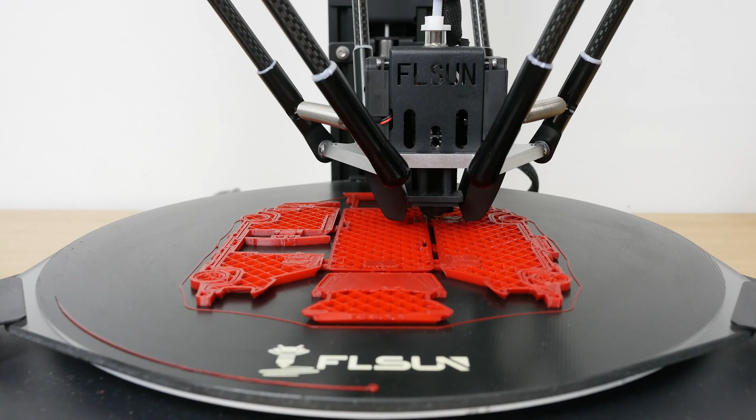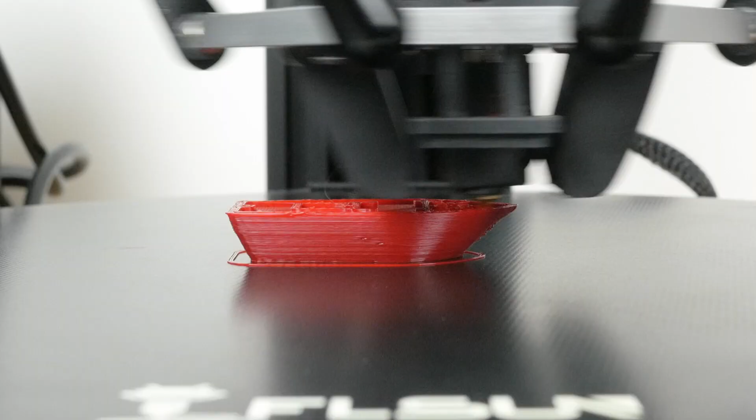The FLSUN Super Racer is capable of printing up to 3 times faster than your conventional 3D printer, and it has auto bed leveling, a 3.5-inch touchscreen and a large print volume. I'll find out how easy it is to set up and use, and I'll put their claims to the test to see just how fast it can print a variety of materials, and how these faster speeds affect print quality.

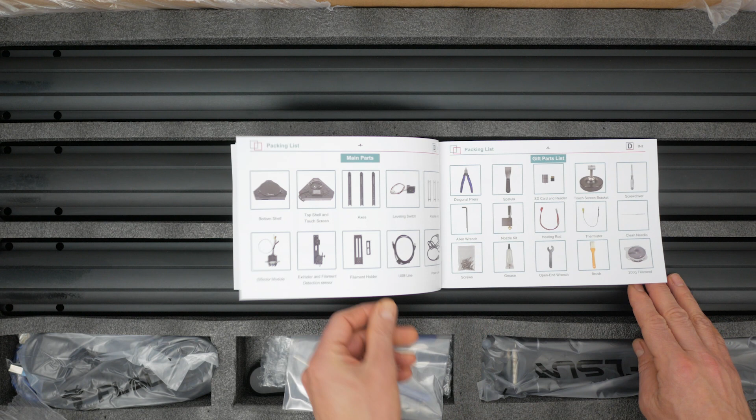The printer comes in a large long box and requires some assembly. There are quite a few parts and assembly does look a little intimidating. But there are clear instructions in the supplied user manual and there's a useful accompanying video too. I'd recommend watching the video first for an overview and then following the instructions in the manual to make sure you don't miss any steps. It'll take 30 to 60 minutes to assemble depending on your previous experience. And it is far easier than it initially seems.

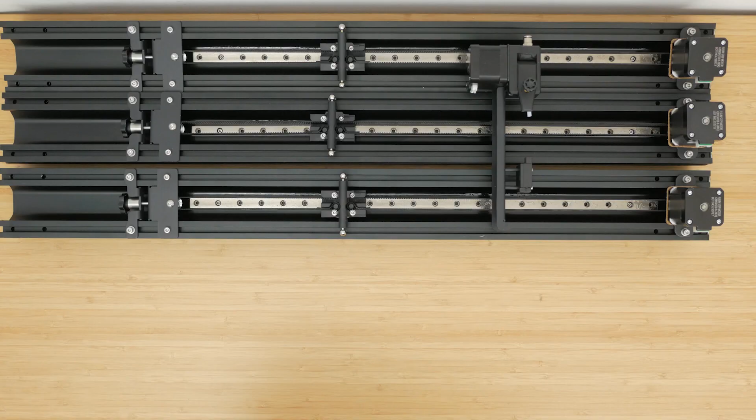All the tools you need to assemble the printer are included, and FLSUN include a generous selection of spares too, including almost a complete spare hotend together with a spare heater and thermistor. There's also a microSD card reader with a 4GB microSD card loaded with an electronic version of the user guide, a test print and links to set up and troubleshooting videos. There's even a piece of sandpaper to clean up your prints.

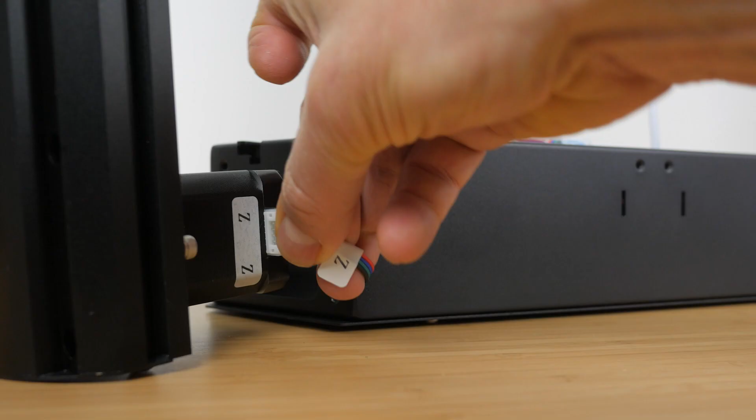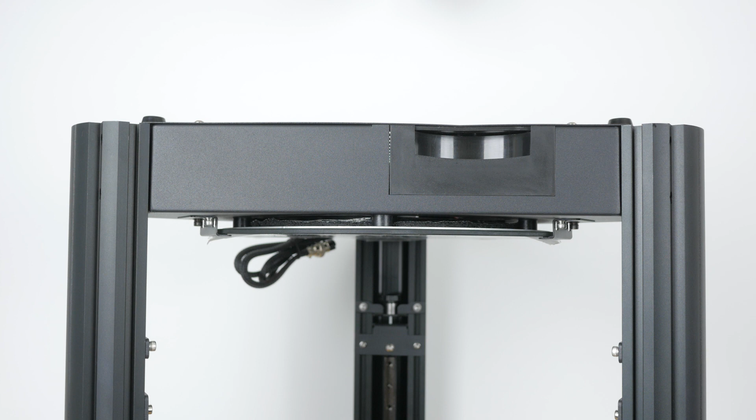You put it together upside down, attaching the 3 800mm axes to the top with the supplied M4 bolts. You'll need to plug in the corresponding stepper motor cable for each axis, which is clearly labelled, before you attach it. Then you bolt the base to the top of the partial assembly in the same way, making sure the FLSUN logo on the base aligns with the logo on the front of the glass build plate. The base has metal tabs which support it while you screw in the bolts, but it's a little precarious. I attached a single bolt to 2 sides before installing the remaining bolts.

Then the touchscreen bracket slides into the groove of the right axis. You'll need to unscrew the bolt from the T-nut so it's flush before sliding it in. Then you can tighten to lock it in place around 1/3 of the way from the top before turning the printer the correct way up to continue assembly.

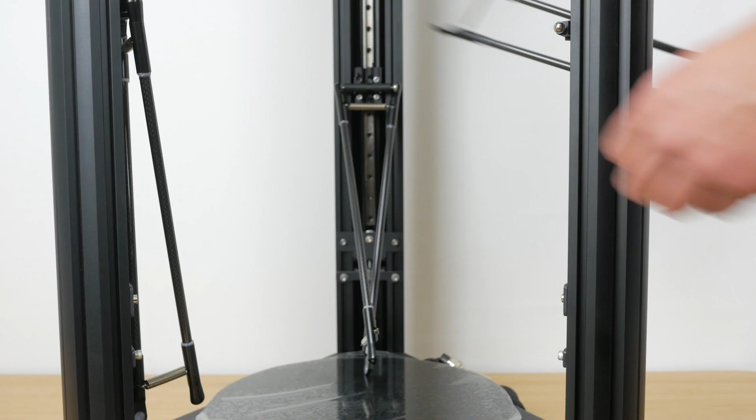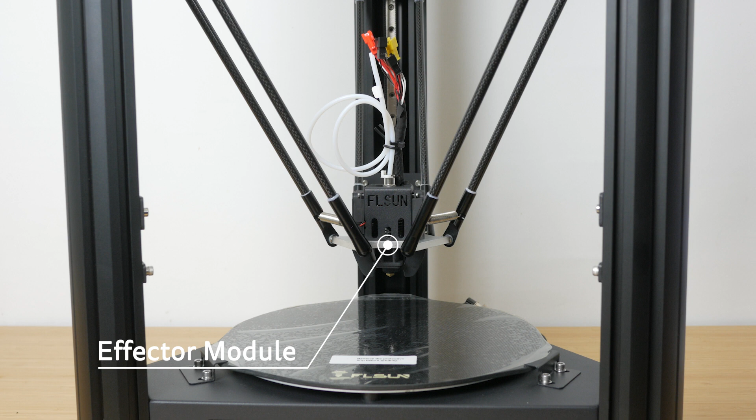The hot end of the printer is already installed in the so-called effector module, which attaches to the linear slides on the 3 vertical axes with lightweight spring-loaded carbon parallel arms. No tools are required to install the parallel arms, just pull them apart slightly and attach all 3 of them to the linear rails first. Then you can attach them to the effector module in the same way, with the FLSUN logo facing forward. The springs are quite tight, so make sure you don't nip your finger.

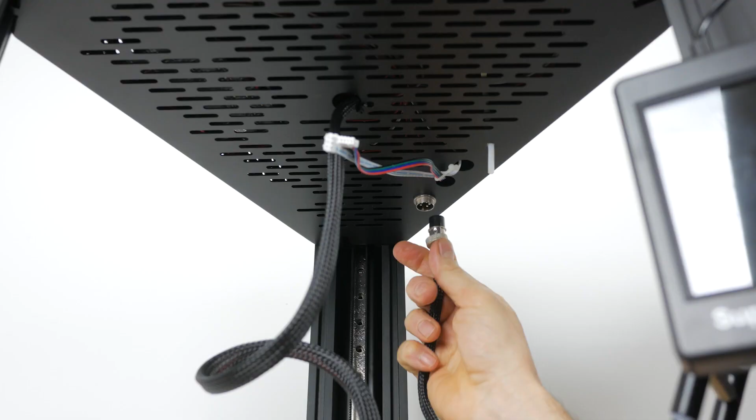Attach the colour-coded cables from the main board to this module. The 2 black connectors can be connected either way around. Then attach the main cable to the top of the unit with its keyed 5-pin connector and tuck the loose cable neatly into the groove of the axis.

Next, attach the extruder assembly, making sure the PTFE tube from the top of the printer lines up with the filament sensor. This hangs from the top of the printer and is secured with 2 bolts. Plug in the filament sensor and extruder motor cable and push in the PTFE tube from the hot end into the bottom of the extruder and secure it with a white clip.

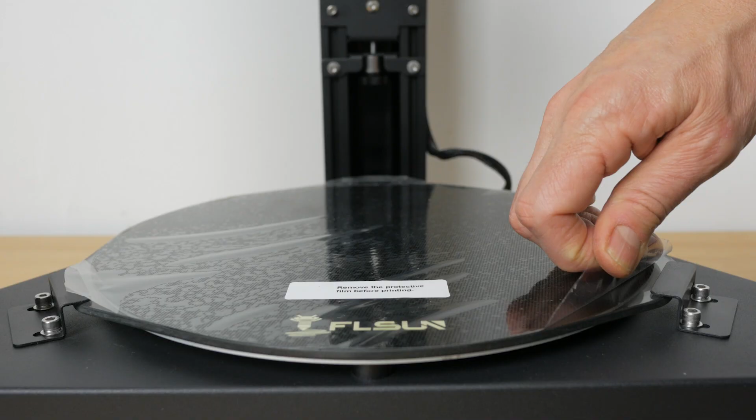Finally, lightly tie the PTFE tube to the main cable, assemble the basic filament holder and attach it to the top of the printer. Peel off the protective film from the glass bed and wipe it clean of any possible grease with IPA, which I'd recommend doing before every print.

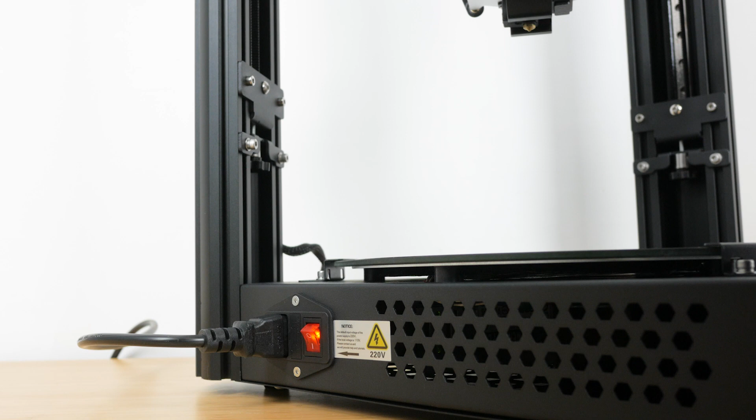By default, the voltage is set to 220 volts, which is correct here in the UK. But make sure you change the red switch to 115 volts in the US or anywhere else on 115 volts before you turn the printer on. I found the supplied mains cable was a loose fit, so used the spare cable I had. It is a standard kettle or IEC power lead, but I'd have expected better quality.

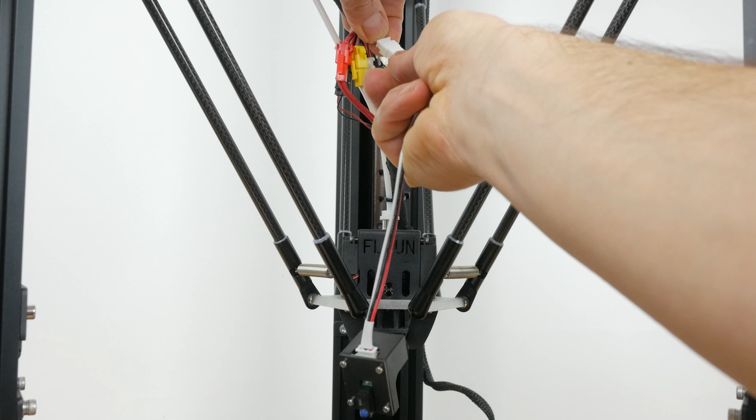The printer has automatic bed leveling, but unusually you'll need to attach the leveling sensor every time you level the bed, and must remember to remove it afterwards. Fortunately, since the bed is stationary, you only really need to do this occasionally, for example after a nozzle change or if you update the firmware. Connect the leveling switch to the cable labelled level and then attach the sensor magnetically, just in front of the nozzle.

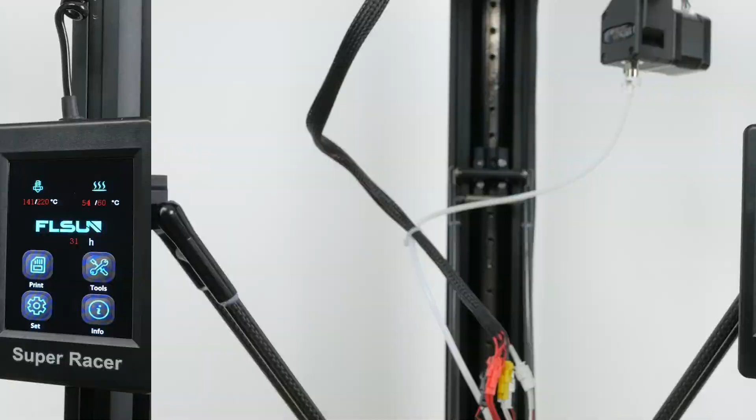Turn on the printer and tap Tools, Heat, PLA to heat up the bed and nozzle. When the printer is heated up, tap Tools, Auto Level, then Auto Leveling and confirm that the leveling switch is attached.

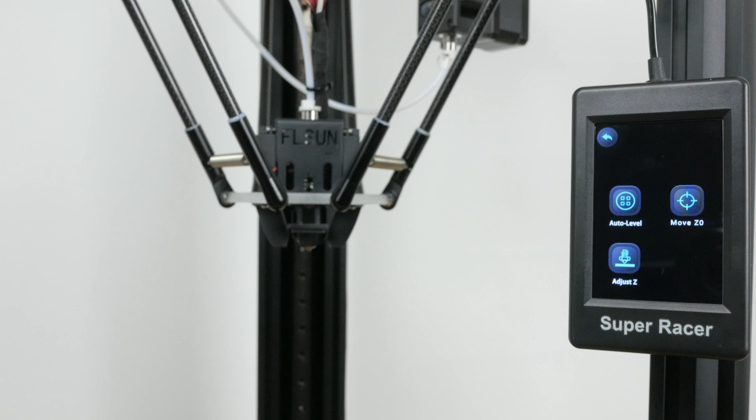The leveling process is quite slow, taking around 3 minutes. You can then remove the leveling switch and set the Z offset, which adjusts exactly how far the nozzle is from the bed. Tap Move Z0, and this time confirm the leveling switch is removed.

Use a piece of plain paper underneath the nozzle to set the nozzle height. Tap Adjust Z and move the nozzle until it just touches the paper. You should still be able to move the paper with just a little resistance.

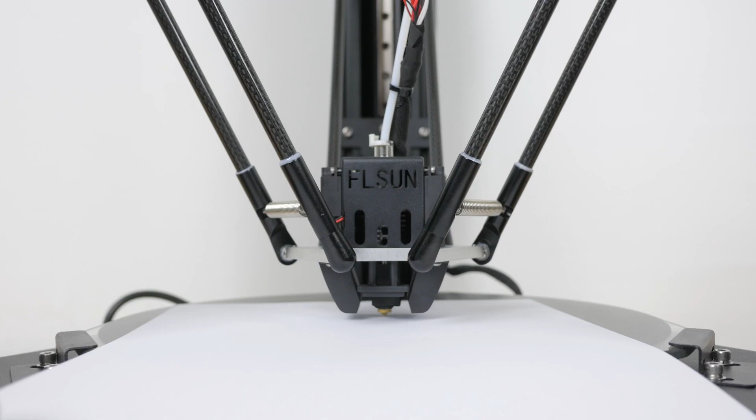It's important you do this when the nozzle and bed are hot, to take account of expansion, otherwise the nozzle may dig into the bed when you go to print. With filament loaded, it also ensures any melted filament is cleaned off the nozzle when you drag the paper around. Then tap Save, which records this Z offset and moves the print head back to its home position.

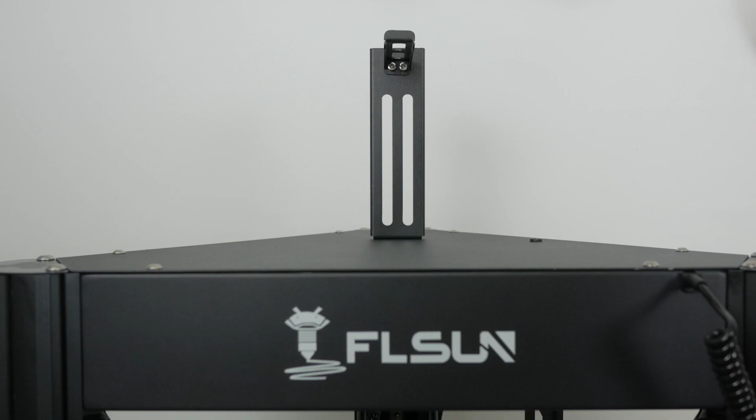You're now ready to load filament. There is a small spool of test filament, but I used some Prusa silver PLA I had to hand.

Load the roll onto the filament holder, cut the end of the filament at a 45-degree angle, and feed it through the hole in the top of the printer, down through the filament runout sensor, and then guide it through the PTFE tube of the extruder.

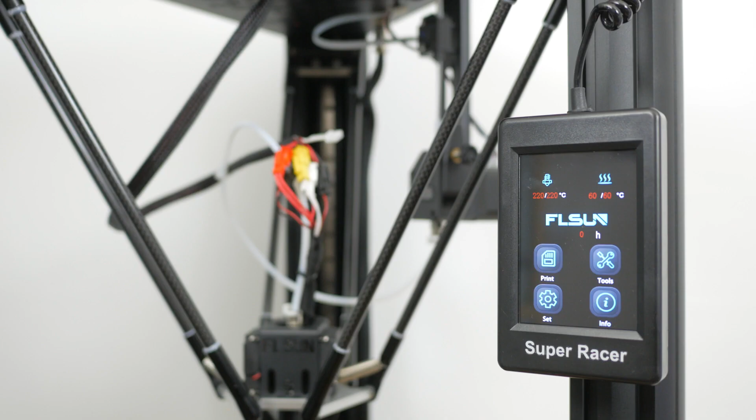Make sure the temperature of the nozzle is set appropriately for the filament you have loaded, and tap Tools, Change, and then tap In while pushing the filament into the extruder gears. You also have the option to set the nozzle temperature here.

You might have to slightly twist the filament to make sure it's pulled through the extruder into the PTFE tube below. The filament will be pulled through to the nozzle. Click Stop when some filament has been extruded.

In general use, I'd suggest tapping Stop when it reaches the hot end and using the Tools Extrude option to actually push filament through the nozzle. The Change function puts unnecessary stress on the extruder. Even though it's what the manual suggests, it's far too fast for extruding filament, and you'll hear clicking from the extruder.

The FLSUN Super Racer is a delta printer, which means it's built for speed, with a very light print head that hangs off arms attached to linear guide rails on 3 vertical axes. These 3 arms move independently, and with some clever trigonometry calculations allow the nozzle to be precisely and quickly moved anywhere in 3D space.

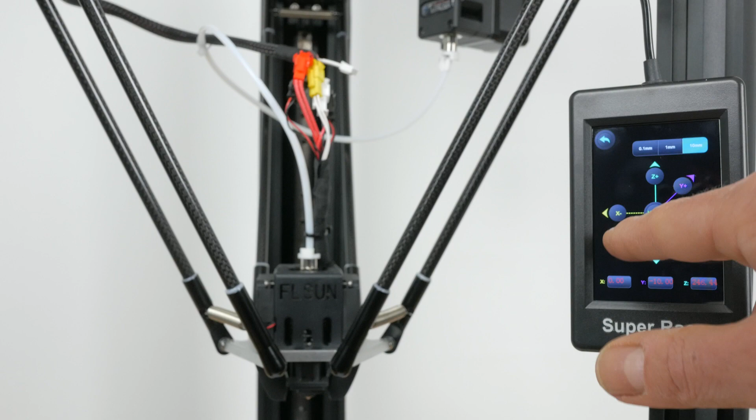The Super Racer claims print speeds of up to 200mm per second, around 3 times faster than a standard Cartesian 3D printer like an Ender 3 or a Prusa Mark 3S Plus.

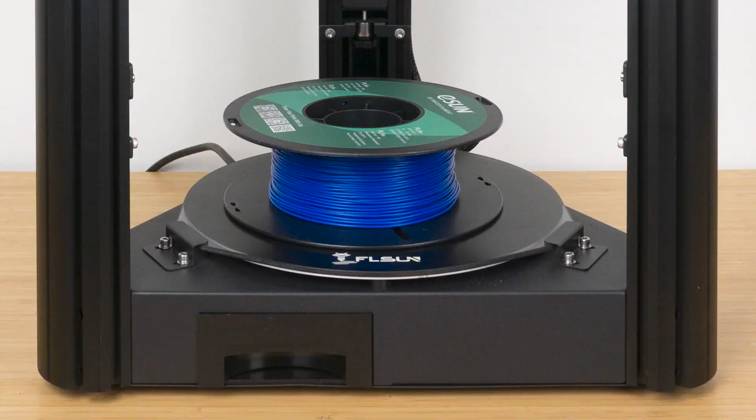I'll discuss print speeds and how they compare shortly, but typically this printer is about twice as fast as the fastest conventional 3D printers I have, with the same nozzle size and layer height. However, they are much taller than these conventional printers and tend to be a little more expensive too.

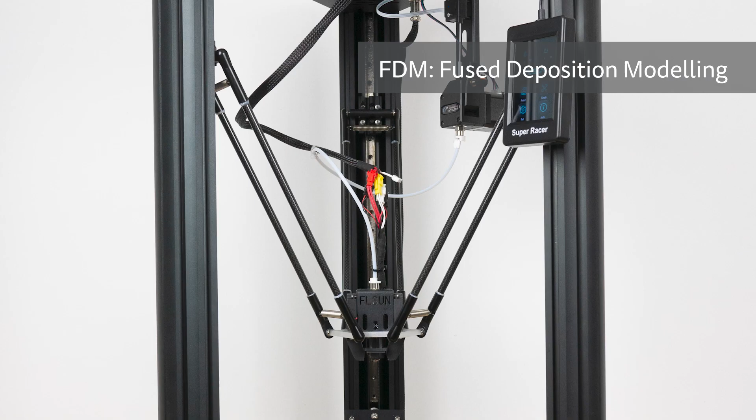Although the head moves around differently, in all other ways it's just like any other FDM printer. It uses a longer volcano-style 0.4mm nozzle with part cooling fans either side.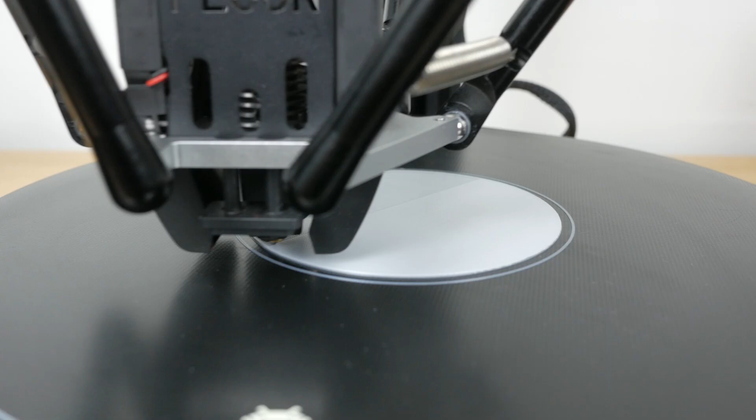This is fed via a Bowden setup with 565mm of PTFE tubing from a cheap clone of the dual-drive Bondtech BMG extruder. It has a build volume with a 260mm diameter and 330mm height, although it loses a little of that maximum height as it moves out from the centre of the coated circular glass bed.

I would have much preferred a removable flexible PEI sheet like on my Prusa printers and the Anycubic Vyper I reviewed recently. The printer has a rather nice 3.5-inch touchscreen, which is very responsive and can be detached from the rail for easy use.

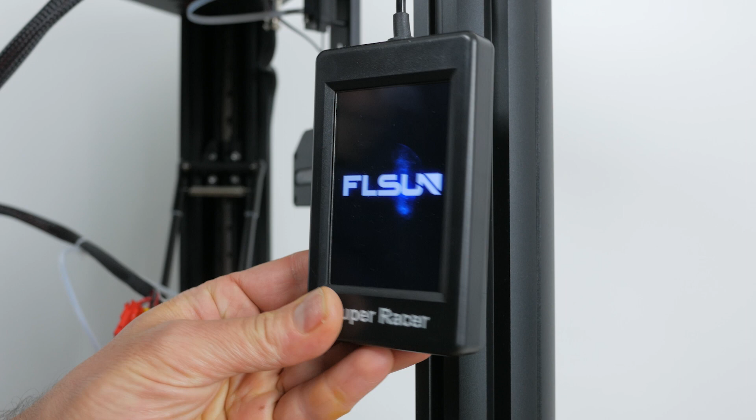It doesn't show print thumbnails, and you can't control any of the printer's advanced settings like flow rate, but for most people it'd be fine.

And you can connect the printer with a USB cable to Pronterface or control it wirelessly via Octoprint if you want more control, both via the USB-B port on the side of the printer.

Beside the USB-B port, there is a USB-A port for connecting a USB stick, and next to that a microSD card slot, which is enabled by default. To use this USB port, you bizarrely have to flash the firmware, which isn't exactly user-friendly.

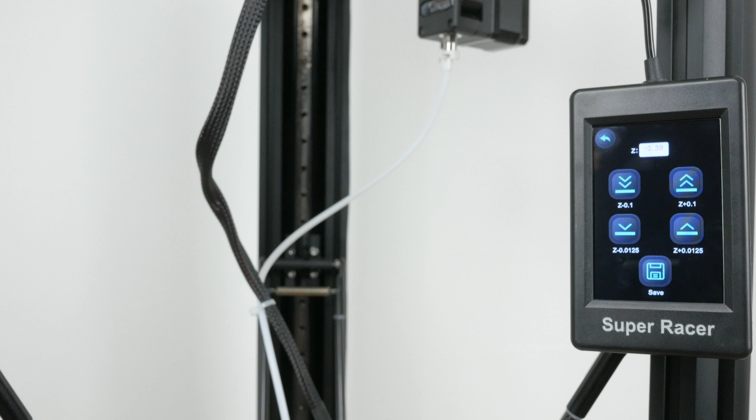Before I started the first print, I upgraded the printer firmware, which you can download from FLSUN's website. The latest firmware has smaller Z offset adjustments, 0.0125mm, compared to the fairly coarse 0.05mm adjustments of the firmware supplied with my printer, which makes it easier to set a perfect first layer, although these smaller steps aren't available when adjusting live Z height during a print, only the larger 0.05mm steps.

The user manual describes the process to update the mainboard's firmware, but you'll also need to update the touchscreen firmware, which is not well documented. Back up the contents of the microSD card and format the card with a 32KB allocation unit size. Then copy the .bin file from the Nano V3 TF card to the root of the microSD card and turn on the printer with the card inserted.

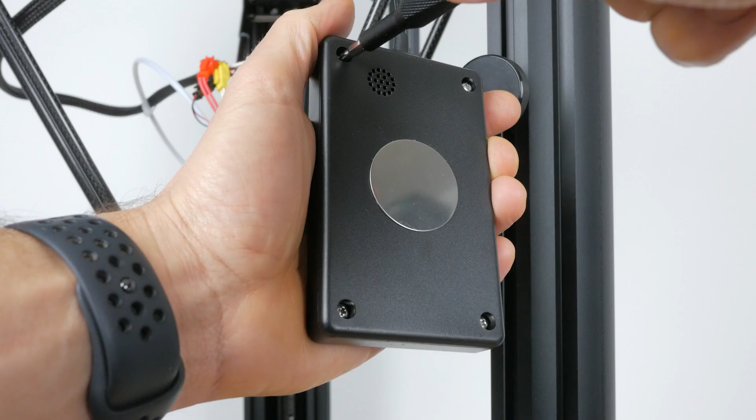Then you need to update the touchscreen. Again, format the card, but this time with a 4096 byte allocation unit size. Use a command prompt and enter the command on screen. Copy the dwin_set folder to the root of the microSD card, turn the printer off and remove the back cover from the screen, which reveals a microSD card slot. Insert the card into this slot and turn the printer on. When 'end' appears at the top of the screen, turn the printer off, remove the card and reattach the cover. Turn the printer on and confirm you now have the latest firmware under Info, in my case version 1.3.

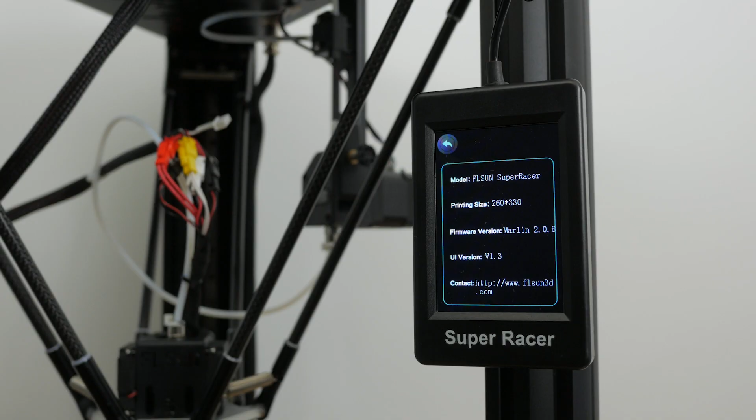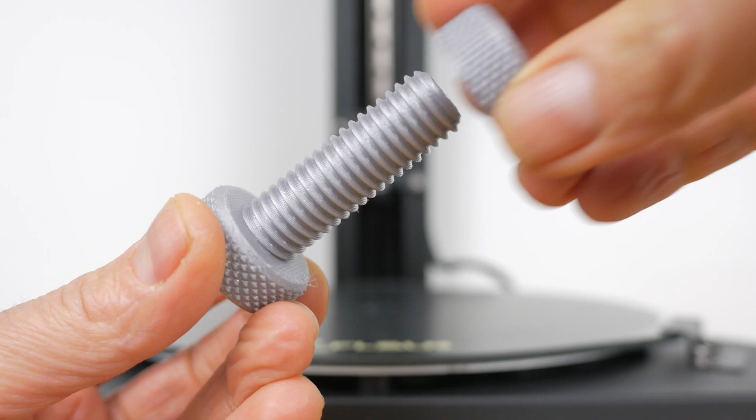Reformat the card with 32KB allocation unit size and copy the file you want to print across. I started with the nut and bolt test g-code that came with the printer. Be careful with file names since the display only shows 22 characters. I got an almost perfect first layer and the print completed with the nut and bolt fitting together nicely, but I did notice the high-speed infill was a bit of a mess.

I then tried a more demanding model sliced myself in FLSUN's preferred slicing software, Cura. I recommend downloading the latest version of Cura, not using the version on the SD card. I was pleased to see Cura already has this printer in its database, so all you need to do is find the FLSUN Super Racer in the printer list on the program's startup. Two profiles are included: a fast normal 150mm per second profile at 0.2mm layer height, and a slower fine profile at 80mm per second and a 0.12mm layer height.

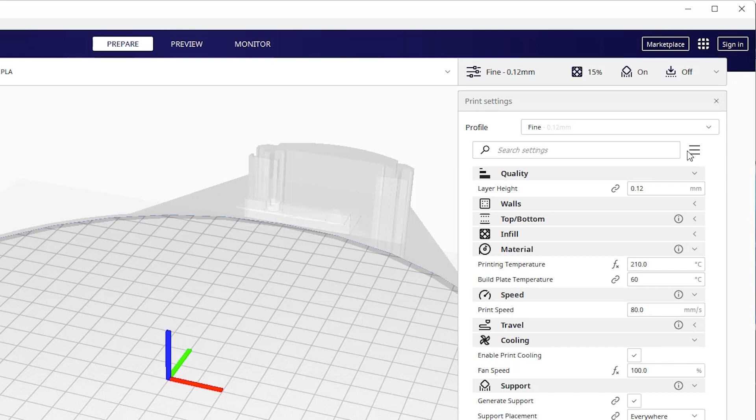I sliced a 3D Benchy model with normal settings, again with Prusa Silver PLA. It started okay, but as before it looked like the printer couldn't keep up with the infill speed settings and this print failed. I was pretty sure there was an issue with a cheap extruder.

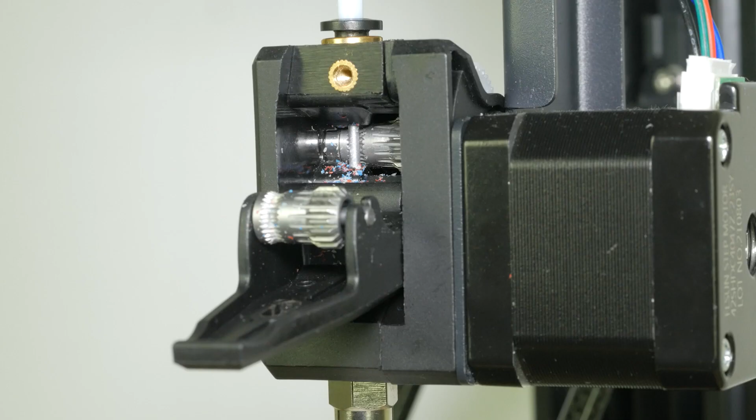Even when loading filament, I could hear it clicking and missing steps. And if you tighten the tension adjuster knob, the gear just chews through your filament. Raising the temperature of the nozzle, which should put less demands on the extruder, didn't help. I pinched the extruder off my Anycubic Vyper, which is pretty much identical, but had the same issue.

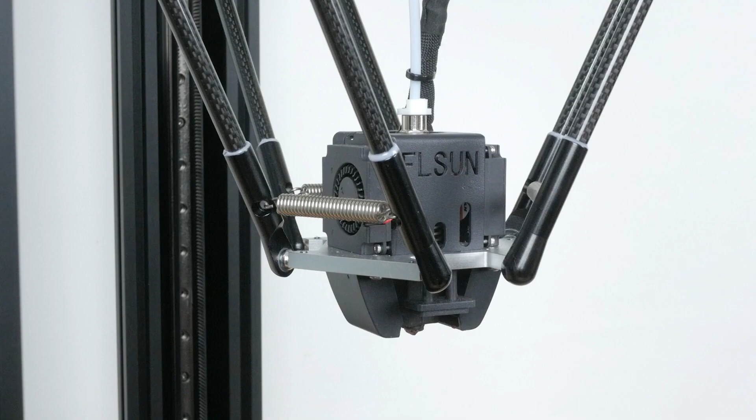I then turned my attention to the hot end. It appeared I already had a partially clogged hot end. I tried a cold pull to clean out the hot end, that didn't help. So with the temperature at 240 degrees centigrade, I removed the nozzle and cleaned it with a small butane torch and the supplied acupuncture needle.

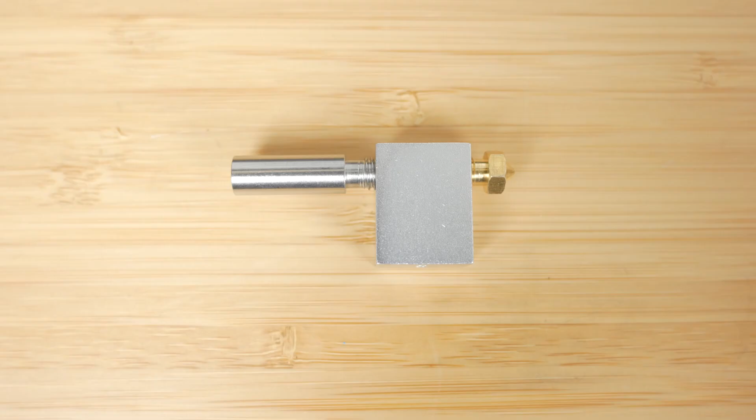Then I removed the PTFE tubing from the hot end and cleaned it out with one of the supplied Allen keys. I reattached the nozzle, making sure it was tight against the heat break whilst holding the heater block securely. Unfortunately, this is not an all-metal hot end, and the PTFE tube goes all the way through the heat break and contacts the nozzle inside the heater block. You need to make sure there is no gap.

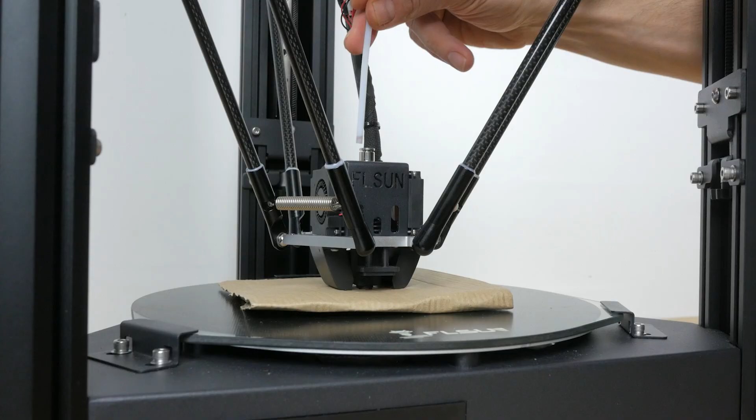Put a piece of folded cardboard underneath the nozzle to protect the bed, and manually push the nozzle down onto the cardboard. Then push the PTFE tube in as far as it will go and insert the white locking clip. Check there's no movement as you pull the PTFE tubing up and down. If there is any movement, remove the clip and again try and push the PTFE tubing as far as it will go.

At this stage I also connected to the printer wirelessly via Octoprint to calibrate the extruder. It was under extruding slightly. I had to change the E-steps from 410 to 416. Since I thoroughly cleaned the hot end, I've had far better results. This shouldn't happen after one test print with PLA.

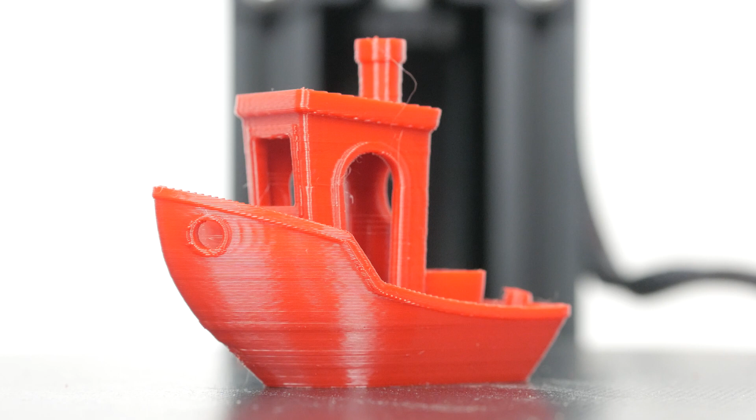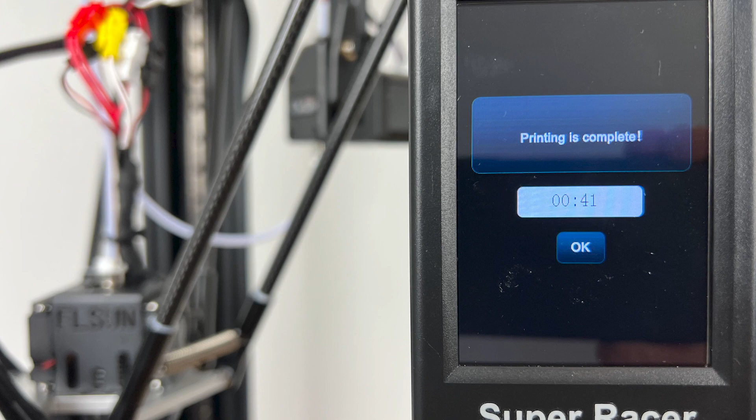I tried the 3D Benchy print again and this time it completed successfully. I used red FLSUN PLA+. There is a little bit of very fine stringing, but that's more likely due to the filament not being completely dry. And the cooling is not quite sufficient at these high speeds around the hull of the boat with its steep overhangs. You can also see some ghosting or ringing if you look closely. But the print was completed in just 41 minutes. That's less than half the time the print takes on my considerably more expensive Prusa machine, with Prusa's 0.2mm 60mm per second speed setting.

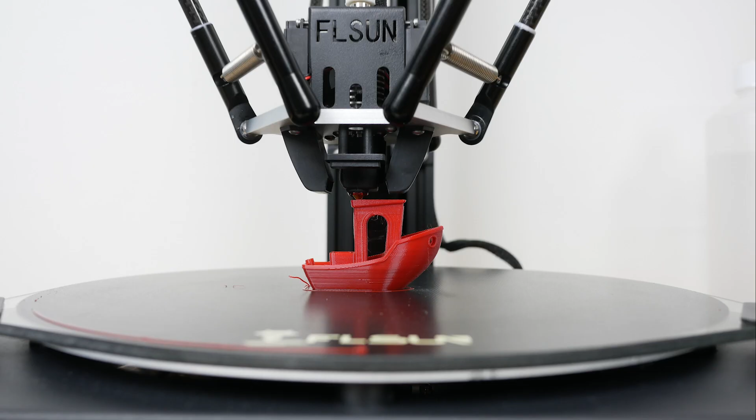I also tried this print with a fine setting, but changed the layer height to 0.2mm. This print is better quality. The hull overhangs printed better and there's no noticeable ghosting, but it's fairly difficult to tell them apart unless you look closely. And this printed in 58 minutes, still considerably faster than the Prusa.

Just for fun, I tweaked the 150mm per second profile to see how fast I could print the 3D Benchy. I upped the speed to 220mm per second and enabled jerk control. This print completed successfully in 34 minutes, which is very impressive. It looks similar to the 150mm per second print with just a little more ghosting.

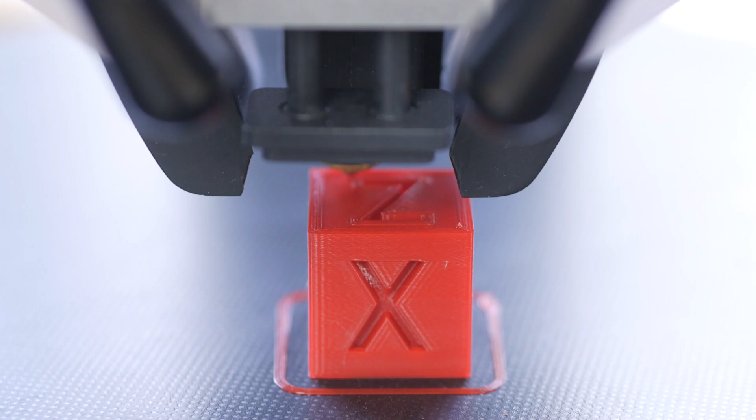To test the dimensional accuracy, I printed a calibration cube, and even with the 150mm per second normal setting, the accuracy was about as good as you can expect from FDM printing, which I wasn't expecting.

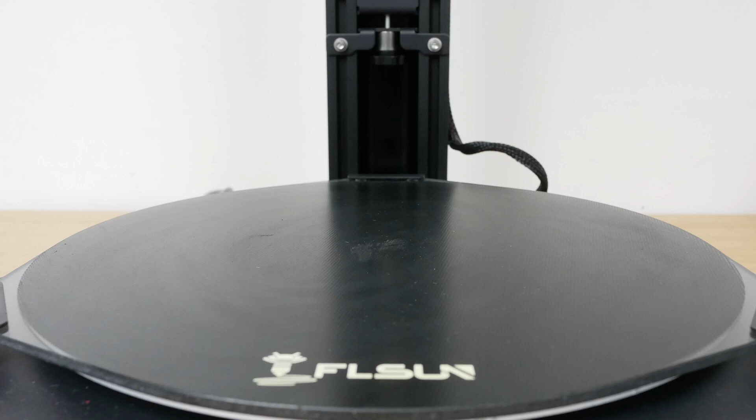As a more demanding test, I tried a tough, longer print. This A-Team van from Fab 365 took just 5 hours 19 minutes to print, again at 150mm per second and 0.2mm layer height. The same print would take double that time on any other FDM printer I've tested. This print uses up a good portion of the print bed, so it's a good test of auto leveling, and since it's a foldable model, tolerances need to be just right.

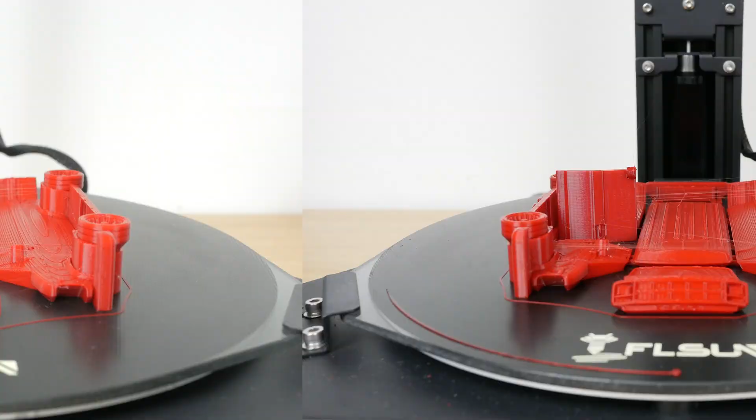I left this overnight and was honestly not expecting it to print successfully. If you let the glass bed cool right down, prints do come off quite easily, and the first layer looks almost perfect. It also snapped together about as well as any other print I've tried like this that normally takes a lot longer. The live hinges all printed successfully and the wheels spin as they should.

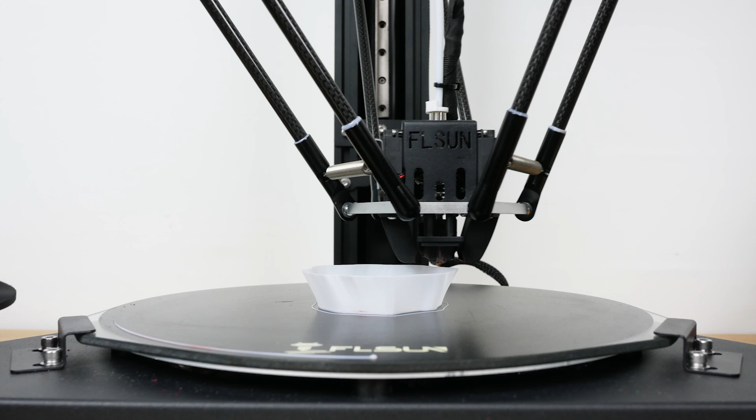I tried a couple of larger vase prints in Anycubic white PLA, which also printed very nicely and quickly. This 14cm tool vase printed in 1 hour 7 minutes, and this more complex vase my daughter wanted for her IKEA plant printed in 2 hours 38 minutes. Both were printed in vase mode, which prints in one continuous spiral at 150mm per second and 0.2mm layer height.

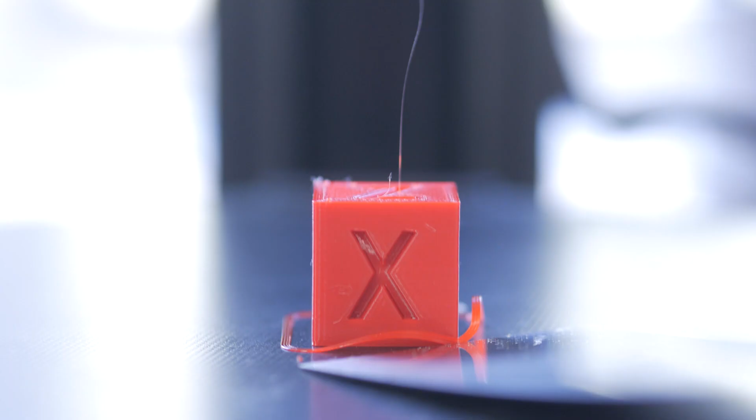If you don't have the patience to let the bed cool down, prints are harder to remove and you'll need the supplied spatula. If they're really tough to get off, check you haven't got your Z offset too low.

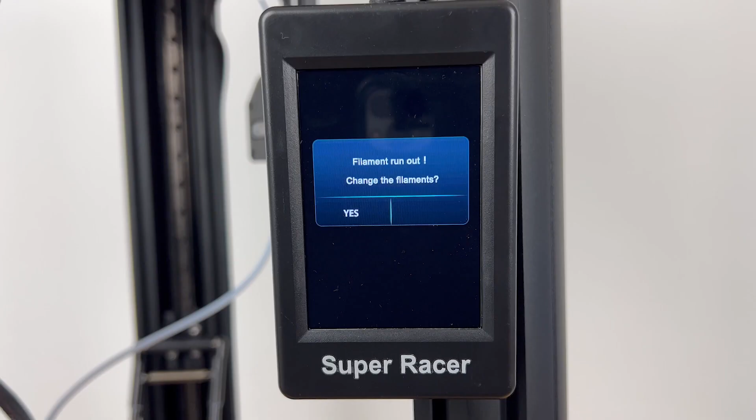The printer has a filament runout sensor, which I tested next. When the sensor detects no filament, you'll get a prompt to change the filament. The printer head lifts off the print and you'll be presented with a change filament menu to unload the existing filament and load the new filament.

It's a good idea to have some tweezers handy to remove any excess filament. When you're done, you can tap back and the print continues from where it left off. The bed stays at temperature and it worked pretty well for me.

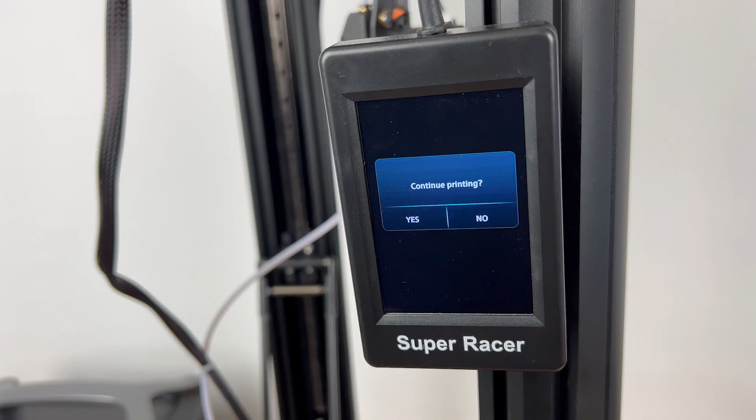I also unplugged the printer mid-print to simulate a power cut and test the print resume feature. When the printer has power again, you'll get a prompt to continue the print. The nozzle lifts off the print and the bed and nozzle heat up to temperature and then continue from where

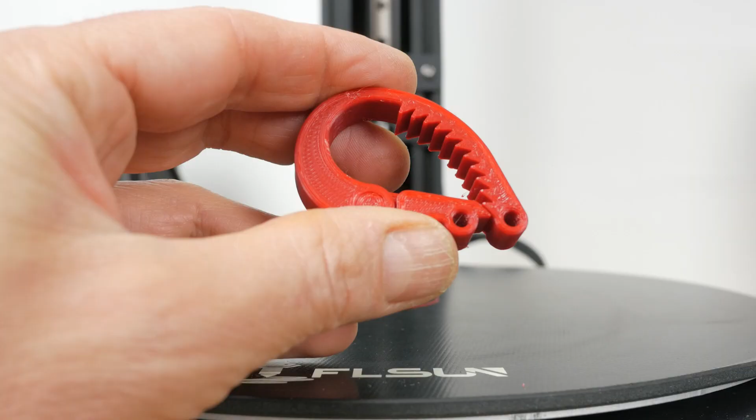it left off. There will be a small blob of filament where the print was interrupted, but if you're lucky it won't noticeably mess up the print. This little ratchet clip still looked okay and worked fine after this interruption.

As I mentioned earlier, the printer should be capable of printing PETG, even though FLSUN didn't recommend it when I contacted them for a profile. I think the reason for this is print speed. This is marketed as a fast printer, but it's just not up to printing PETG, which requires a higher temperature than PLA at these higher speeds.

Typically, PETG needs to be printed at around 240 to 250 degrees centigrade. But if you want to print at higher speeds with a somewhat weak extruder, you need to up this by at least 10 centigrade, which is beyond the capabilities of the hot end. You'd really need to upgrade to an all-metal hot end for these higher temperatures, since at 250 degrees centigrade, the PTFE tubing can start to degrade.

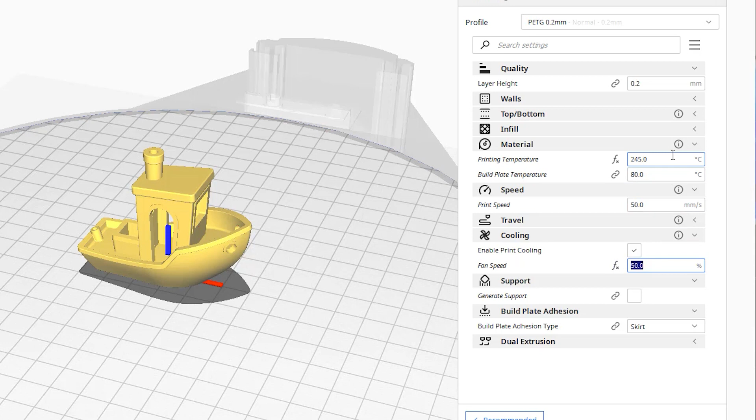I spent a considerable amount of time trying to perfect a PETG profile in Cura. I did eventually arrive at something that gave decent results, albeit at much lower speeds. I brought the speed down to 50mm per second, turned down part cooling, and printed at 245 degrees centigrade with Prusament Galaxy Black PETG. After further experimentation with retraction settings, I had to increase retraction to 7.5mm to reduce stringing, but left retraction speed at 40mm per second.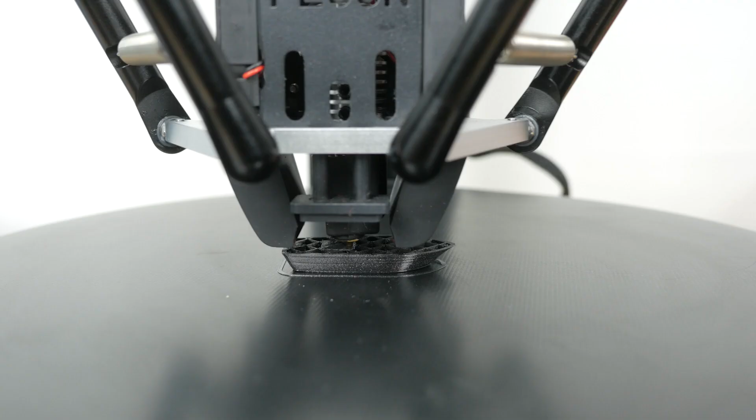With these settings, I got some more than acceptable results. 3D Benchy looks good with no significant issues, but I did find whatever adjustments I made, there was a little warping. The bed was thoroughly cleaned with IPA, Z offset was adjusted correctly, and I tried turning off cooling for more than just the first few layers, which helped the most.

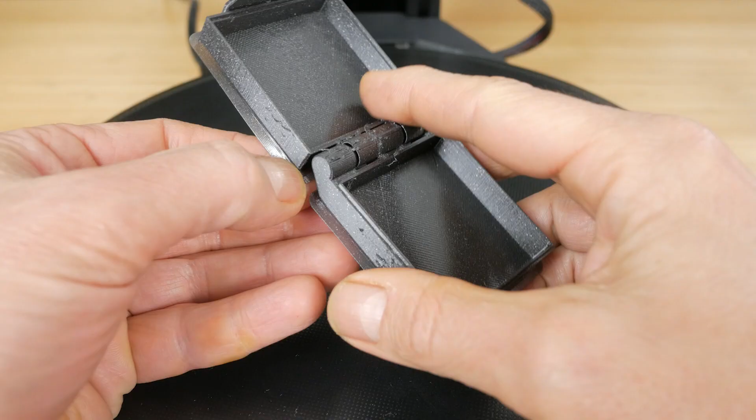But as you can see again, with this small box, the print still lifted slightly on the corners. I had to resort to using a brim in the end to keep it stuck down. I think this glass bed is just more suited to PLA. I also tried printing flexible filament, which isn't even listed as a supported material.

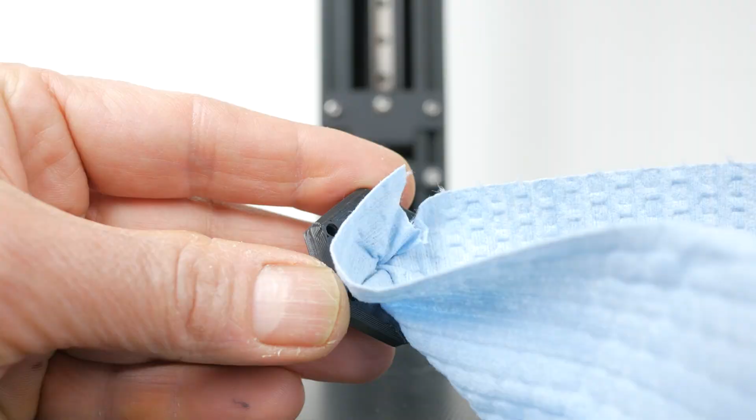I didn't try more flexible filament like Ninja Flex, but I imagine that may be too much for this cheap extruder together with the Bowden setup.

The nozzle and bed heat up fairly quickly and typically draw up to 300 watts from the built-in 360 watt power supply. I measured around 2 minutes 20 seconds to get the nozzle to 215 degrees centigrade and the bed to 60 degrees centigrade, about 25 seconds slower than my Prusa Mark III S Plus.

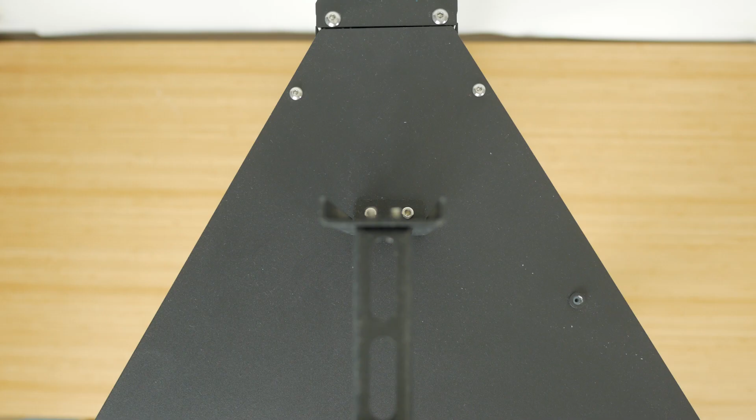The printer has a 32-bit mainboard with silent stepper drivers, and the X, Y and Z movements are very quiet, but the power supply fan, which is always on, is quite loud, as is the hot end cooling fan. But it's actually the extruder that's most noticeable when printing, especially with the large retractions. I also found with some prints there was some rattling with faster print moves.

Despite a slightly shaky start with the clogged nozzle, I've been impressed with the FLSUN Super Racer. If you want to print PLA fast, it's the best option I've tested so far. Yes, you can swap to larger nozzles on non-Delta 3D printers to increase speed, but you lose resolution, and for a lot of prints the Super Racer will still be faster, and with a standard 0.4mm nozzle and 0.2mm layer height, print quality even at 150mm per second was pretty good.

There was some ghosting and the part cooling fans were a little underpowered, but I found the quality good enough for most of what I like to print.

Dropping the speed to 80mm per second, the printer was still quite quick and the quality was definitely improved. The auto bed leveling also works really well, and since you only have to do it very occasionally and not before every print, prints start quickly too.

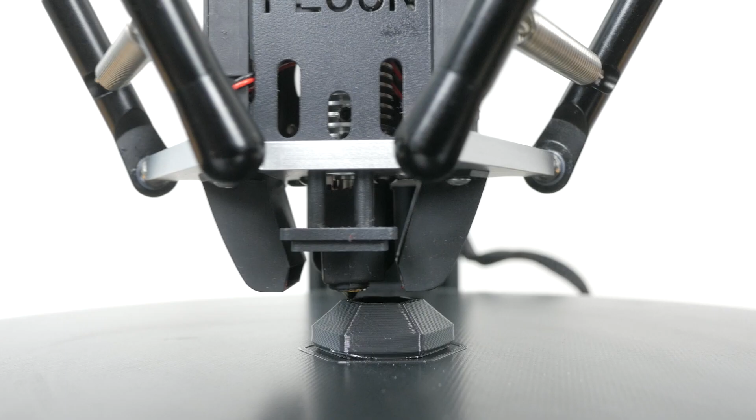I did successfully print PETG and flexible filaments with this printer. Without any upgrades, you'll have to drop the speed right down. And I'd really like to see FLSUN include profiles for these plastics. Without an all-metal hot end, you won't be able to print any high temperature materials like nylon or polycarbonate, and very flexible filaments will be difficult with this Bowden setup.

With its stationary bed, the desk space you need to use this printer is actually less than most of my other printers, but you will need a lot of space above it.

In use, the touchscreen is nice to use, but the microSD slot is a little awkward to get to, and switching to the USB port shouldn't require flashing the firmware. And updating the firmware, which includes removing the back of the LCD screen, is overly difficult and not well documented.

I did contact FLSUN when I had the issue with the early failed prints. I always like to see what sort of support is offered with any tech I review. Unfortunately, I just got a single line reply to watch a third-party YouTube video on someone taking apart the extruder. So you're really on your own with this printer. Your best bet is a fairly active Facebook group if you have any issues.

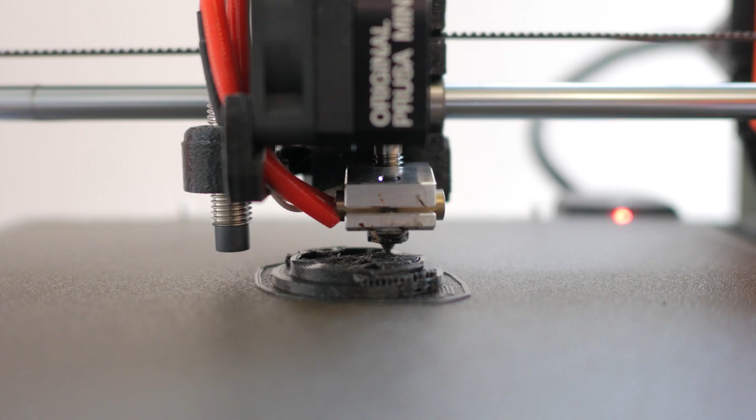But I am pleased to see that spare parts seem to be readily available from local suppliers like 3D Jake in Europe. This printer makes most sense if you print predominantly with PLA. If you tend to use PETG most of the time, you're not going to benefit from its higher speeds. And there are cheaper printers that will do a similar or better job, like the Prusa Mini or the Anycubic Vyper, for example. Unless you plan to upgrade the printer, that is.

I normally like to keep printers stock, but I do plan a few upgrades with the Super Racer, some that I've already ordered. So let me know if you want to see a follow-up video.